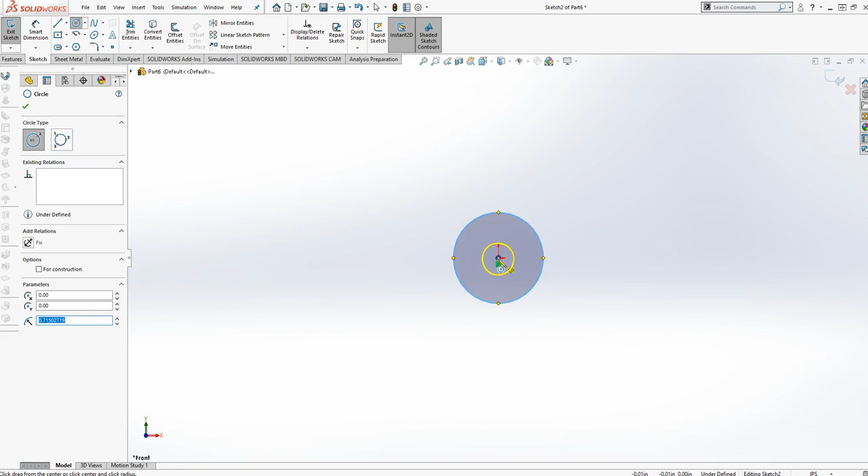I'm going to take my line tool. Let's take a circle tool, and I'm going to draw two circles first off, and then I'm going to take my line tool and I'll see how I line it up with the point here. Just go straight across, up, and I'll just go straight across. I technically could have done that with a rectangle tool, but it is what it is.

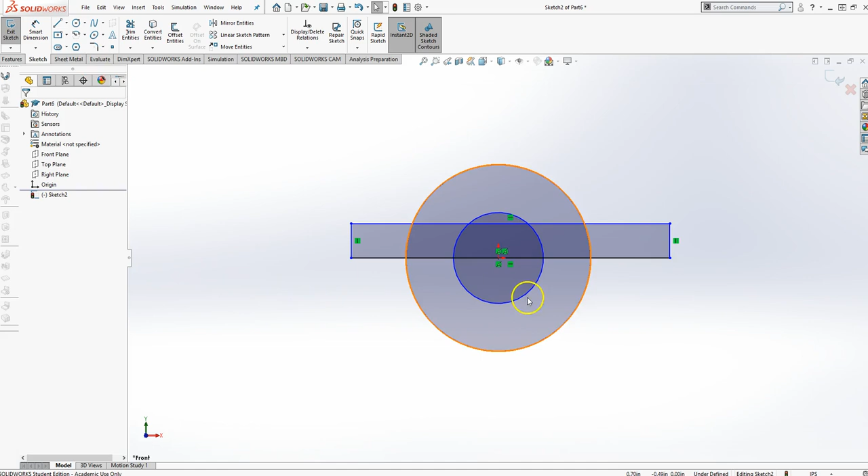So first thing I want to do now is grab this midpoint and the origin and align those coincident so everything's all centered up. I'm going to take my trim tool, I'm going to cut across through here, I'll get rid of these extra lines that I don't need, and we're good to go. So let's apply our dimensions here.

The overall length of this, now here's where you have to do a little math. It's 2.3 from center to center. Now if I was using the slot tool at the top, this would be easy. But 2.3 center to center, but I need to add the radius and the radius to get the full length of it here, the full width.

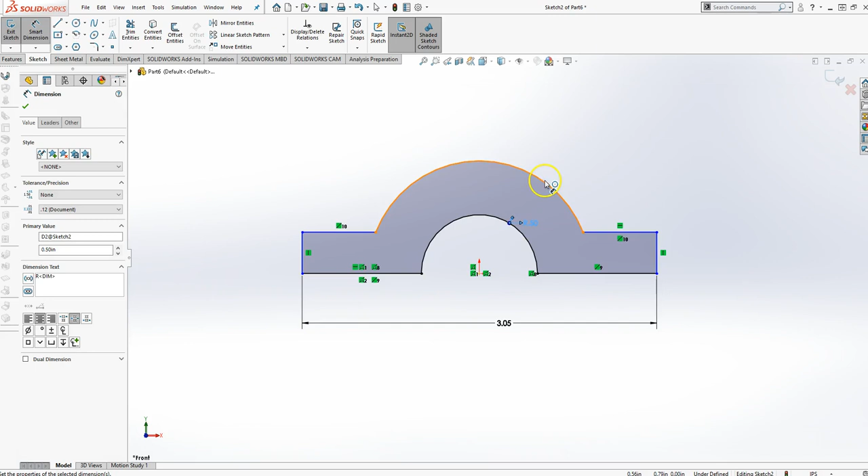And since the diameter is 2 times the radius, I'll just add 0.75 to it. So it's 2.3 plus 0.75 total length. So from this point to this point is 2.3 plus 750 thousandths. So there we go. The radius for this is 1/2 inch, and the radius for this is 875 thousandths. The height here is 375 thousandths.

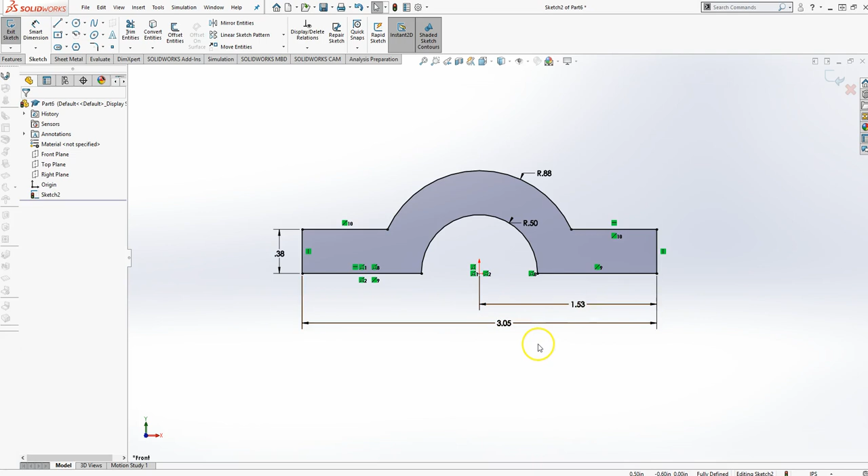And the only reason that these are not defined is because they're not exactly related to the origin. So I can fix that real quick and say a dimension from here to here, and leave it at that because that's half of 305. And there we go. So I'm going to finish that. I'm going to extrude it 0.750. Now I'm going to show you a fillet tool in the feature mode.

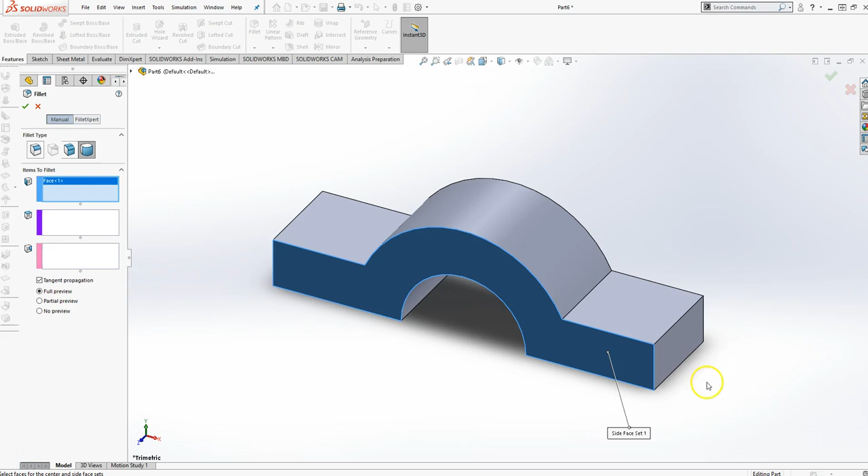So I'm going to go to fillet, and we've been using the constant size fillet symmetrical for quite a while now, but we're going to use a full round fillet. And here's how a full round fillet works. You click a side, then you pick the side that you want to round, and then you pick the other adjacent side. And if you notice, there's my full round, and so I'm going to finish that.

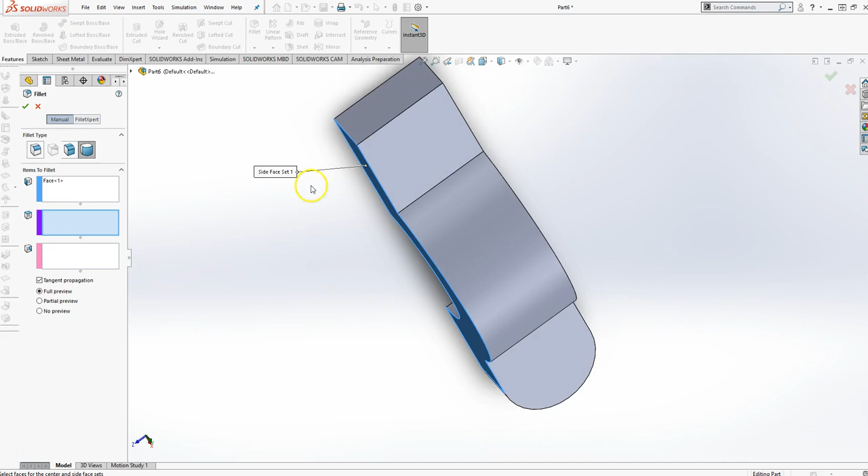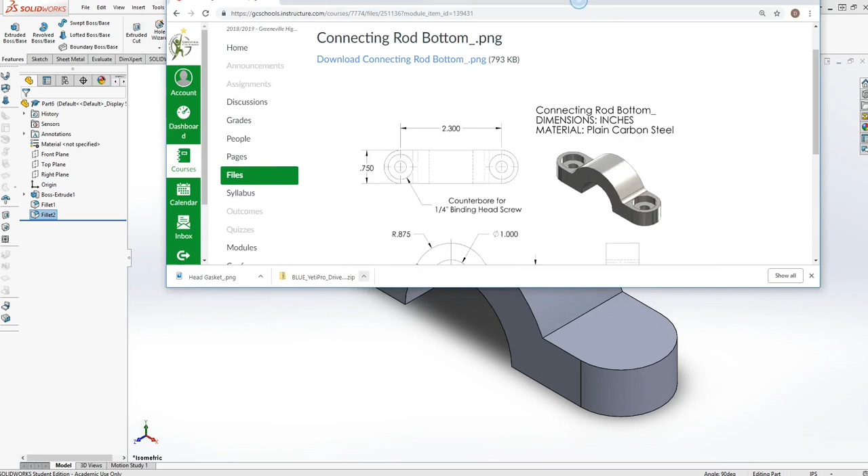And I'm just going to rinse and repeat on this side. Make sure, again, it's full round, side, the side I want to round off, and then the other adjacent side, and finish. Alright, so what I have here is the basics of my connecting rod bottom. The only thing I'm lacking now is a 0.125 fillet right there and right there, and then you've got these holes here. So I'm going to put the holes in first, and then go back and add the fillet.

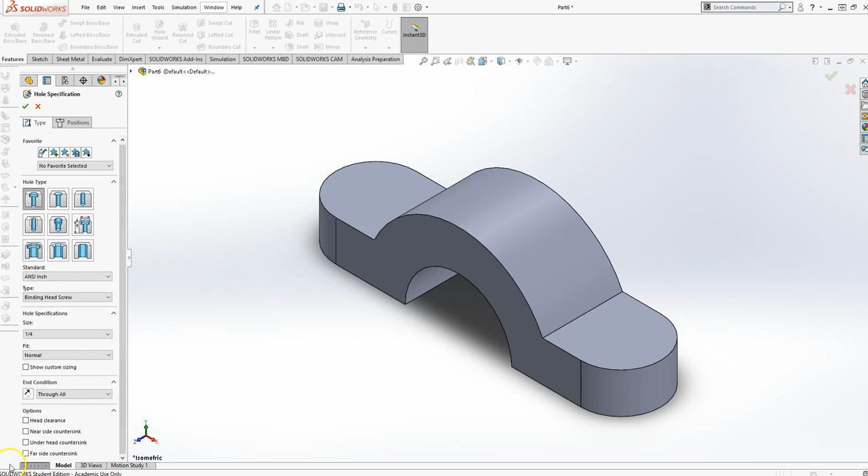So we're going to put a counterbore for a 1/4 inch binding head screw. So to do that, we go to Hole Wizard. It's a counterbore, ANSI inch, binding head screw. Size is 1/4 inch, so scroll down till you get to a 1/4. We'll stay with normal fit. End condition, we're going to say through all because it goes through the whole object, and make sure none of this stuff is selected. Positions, as always, pick the plane.

Hover, you'll see that the center point shows up. They share the same center, so I'll just snap to it and I will finish. And there's our counterbores for the 1/4 inch binding head screw. Then I will use a fillet. I'm still in feature mode, I'm going to switch back to constant size, symmetric. The radius is 0.125. I'm going to select this corner and that corner and finish.

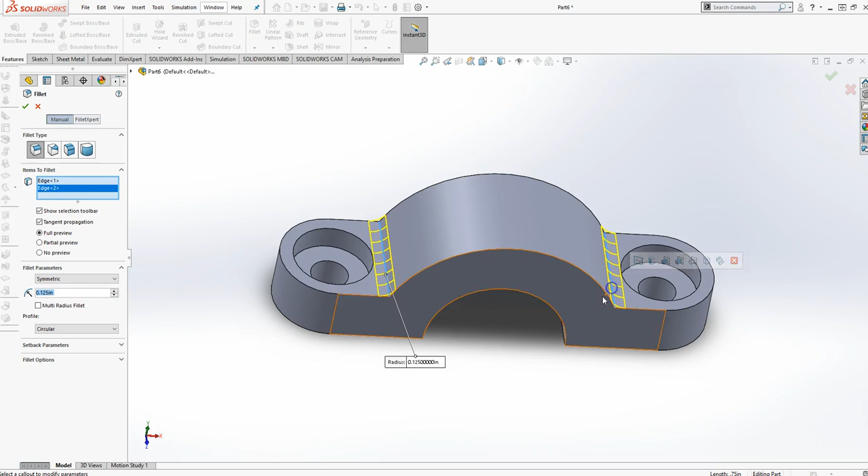And there is our completed connecting rod bottom. Now the material is plain carbon steel. So I'm going to right click on material, edit material, steel, scroll down to find plain carbon steel and hit apply. And we're finished.